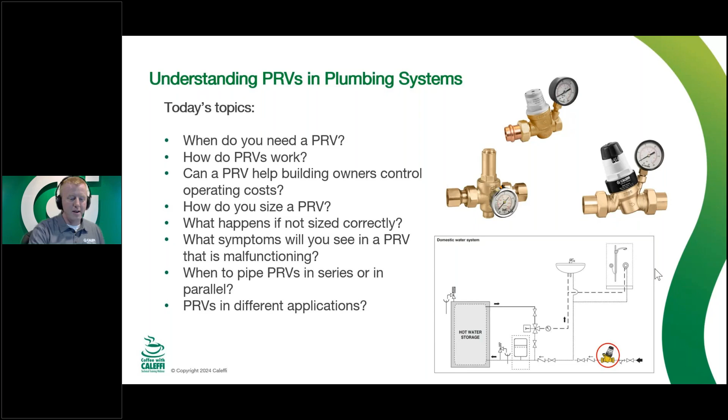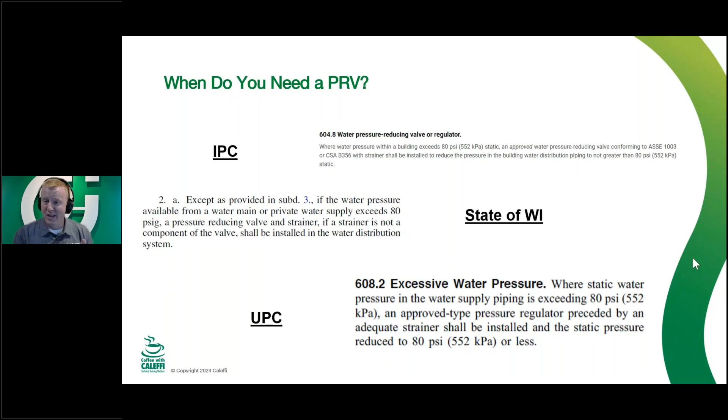So we'll dive right in here. When do you need a PRV? A PRV is a pressure reducing valve, pretty self-explanatory - it's a valve that reduces pressure. But when we talk about why we would need to reduce pressure, the simplest reason is that most of us are abiding by codes that require it. Not only do they call out very specifically 80 PSI, but they also call for a pressure reducing valve, and sometimes even a strainer, if your pressure is exceeding 80 PSI. So right off the bat, we've got IPC, UPC, and the state of Wisconsin, where we're based out of at Caleffi North America - again, 80 PSI is going to be your ticket.

There's a lot of information in there about minimum pressures as well, depending on the types of fixtures and things like that that you have in the building. But obviously for today's webinar, we're really more worried about excessive pressures, not necessarily those low pressures.

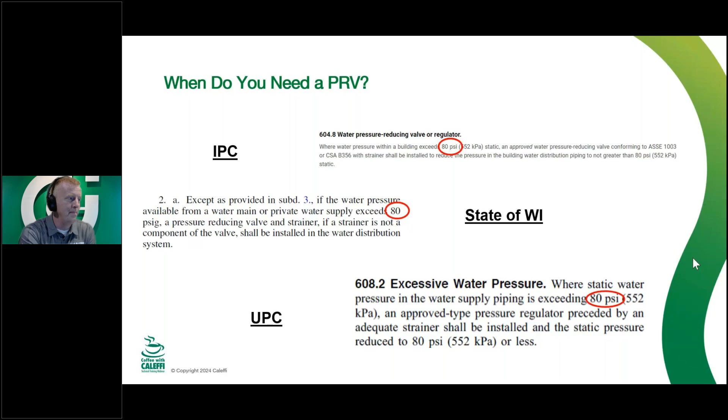So how do we end up with high pressures in residential, commercial, any of these buildings that you might have? Some potential causes for excessive pressure - first is going to be elevation. What we're talking about here is the difference between where the water is stored versus where the water is used. When you look at some places around the world where you've got water towers at a high point, and somebody way down at the bottom of a hill, you've got this potential for incredibly high pressure due to the height difference there.

The basic math here is 0.43 PSI per foot. You can see in this illustration, you've got 100 feet worth of distance from one residential home to the guy at the bottom here, and you'll notice it actually went up 43 PSI - that can be pretty substantial.

But the other thing we're seeing, even in areas in the central United States where we have pretty flat regions - I was in Quincy, Illinois, for example, a handful of years ago, and I always like to ask this question, you guys can feel free to jump it into the chat or questions pane. What's the highest pressure you've ever seen to a residential or commercial building? It's pretty common we'll see 90 to 100, 120 sometimes. But even in Quincy, Illinois, which is probably one of the flattest areas in the country, they were seeing 125 PSI into some of these buildings.

The other thing I always like to mention, especially to residential contractors checking homes during the day as they're checking the pressure coming into these homes - you got to remember that the pressure at that time is not going to be the same as what you'll see during non-peak times, like in the middle of the night. So I always encourage those contractors to put one of those gauges on a hose bib with a lazy arm or lazy hand that will register your peak pressure by the next morning, and just leave it there overnight to see what happens. Because a lot of contractors will see it's 75 PSI during the day and say, hey, I'm perfect, I don't need a pressure reducing valve - but it's not necessarily 75 PSI at night. So we need to make sure we're under that 80 PSI, regardless of elevation or even the flattest parts of the country.

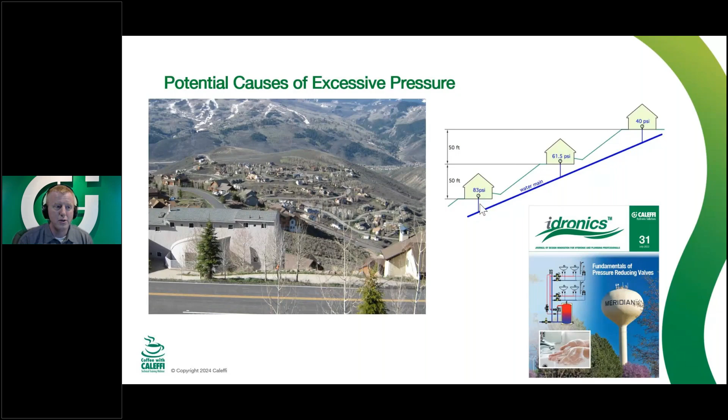So another good reason is going to be because of boosted systems. In order to get pressure to the highest points of a building, whether it be mid-rise, high-rise, whatever, typically if you're going more than 5 to 6 stories, you're probably looking into a booster system.

So as you look at this example on the right-hand side here, we've got a 30-story building, and in order to maintain a static pressure of 35 PSI at the very top of that building to make sure your flush valves work, you need to boost up to 180 PSI. With that 180 PSI, obviously we can't use that at the fixtures on the lower floors.

So we are going to have to reduce that down in those particular areas to maintain a safe pressure for those fixtures. As you can see on the left-hand side, our model, I believe that's Mr. Chris Swade, one of our reps there in the Chicago market, actually setting up and starting up a booster pump system there.

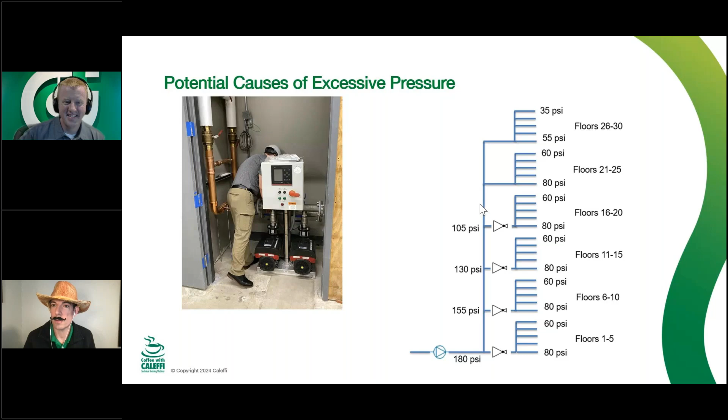Hey Cody, we got a comment that the domestic water pressure in downtown Kansas City is about 120 PSI, so this viewer said they didn't need a booster pump for a 9-story building. Wow, that's interesting. Even in places that aren't mountainous, it can come up.

That's an odd 120 PSI example. I think 120 PSI is enough to blow that fake mustache right off your face, if you got it in the right direction.

But yeah, it's pretty crazy. It's definitely, even in the flatter parts, you're going to see that quite a bit versus that picture we were showing before, I believe that's Colorado. But again, it just depends on where the water is being stored and where you're using it in a lot of cases. Sometimes we're just distributing high pressure like that to try to get out to those far-reaching areas and suburbs.

So when we talk about problems created by high water pressure, the first one that comes to mind is stress on piping and fixtures. You can see that picture on the right-hand side. Your flexible braided type hoses, washing machine hoses, even the flexes running from your stops to your fixtures, are going to be some of the most susceptible, especially washing machine hoses. When you put high pressure on those devices and you have a failure for whatever reason, you are going to have issues, and it's going to lead to insurance claims and all kinds of things we want to try to prevent.

From there, high pressure can also lead to water hammer type events, and more importantly, it leads to a lot of water waste. This is really important in areas that are more drought-stricken, like the southwestern parts of the United States, Southern California, things like that, to where if we can control that water pressure, we can control some of the consumption in those buildings and thus be able to save on water.

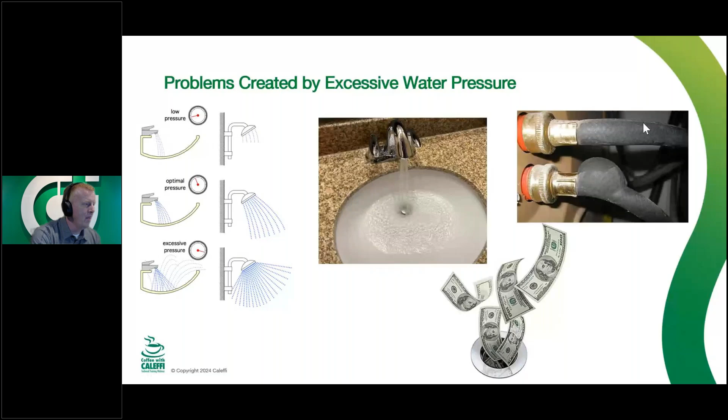So anything to add there, Kevin, before I move on here to the next style? Nope, that's all really good. Okay, perfect, good. Yep, perfect.

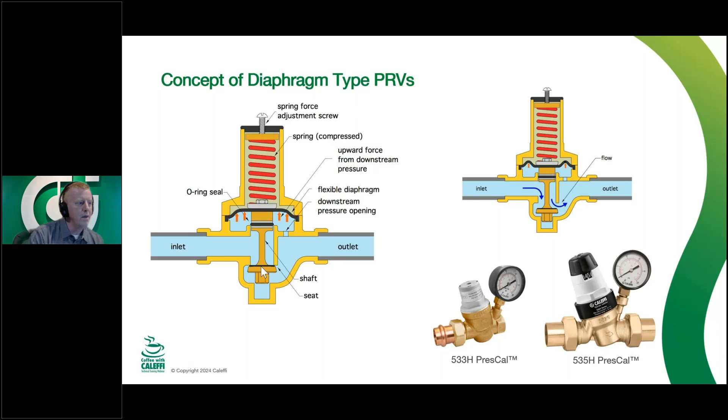You might think to yourself, why on earth would I want to use a piston style PRV over a diaphragm style PRV? Well, piston style PRVs are just a more robust pressure reducing valve. This is a valve that is going to be perfect for applications that experience lots of water hammer. Think of applications like irrigation, or laundromats, or anything with a lot of fast acting solenoids, like dishwashers, where you might see excessive water hammer. They're going to be able to hold up under those harsh conditions. Now, with piston style PRVs, they are slightly less accurate in some cases versus a diaphragm. A diaphragm style PRV is very accurate. Piston style PRV will be slightly less accurate, but it makes up for it with that robust capability of dealing with adverse conditions.

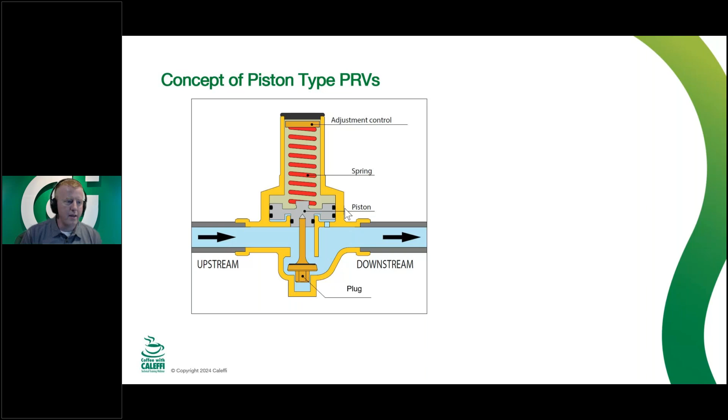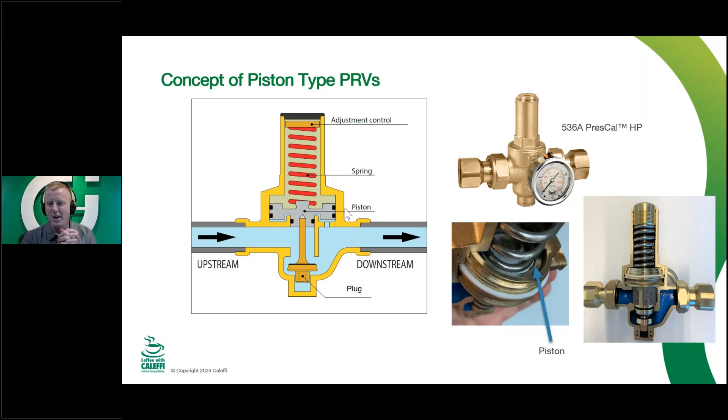All right, so moving on from how PRVs work to how do we size them. If I'm talking with a group of contractors, and I know there's a bunch of you on today, which I really appreciate, and lots of engineers too, coming off the heels of the great ASPE show in Columbus. I hope we saw you guys there, I hope you're able to make it, but we've got a lot of engineers on today. When I talk to those contractors, I always remind them, and the wholesalers too, when we talk about sizing PRVs, it's not just about pipe size. There's many areas, for example, that require a minimum service of 3/4 inch, regardless of how many bathrooms are in a house. We will actually get calls about how they're having some issues here or there, and we'll actually recommend going to a 1/2 inch PRV. Just because it's 3/4 coming into the house, feeding the rest of the house with that 3/4 inch doesn't necessarily mean you need a 3/4 inch PRV.

So, to kind of move on from that, when we talk about sizing, a lot of our water distribution, our domestic hot water, mixing valves, PRVs, all that fun stuff, we're typically doing it off of some version of what we see here, which is going to be referred to as the Hunter's curve.

Basically, we're going to apply a weight to the different types of fixtures. We add up all those fixture units, and from there, we take it over to the curves. You'll notice there are 4 different curves here, based on the different applications, and a lot of this is based on the probability of multiple fixtures being on at one time.

This was actually developed by Dr. Roy B. Hunter in the 1940s. You'll notice the curve at the bottom is for office buildings, the next one up is apartments, the next one up is hospitals and hotels, and the last one is restaurants.

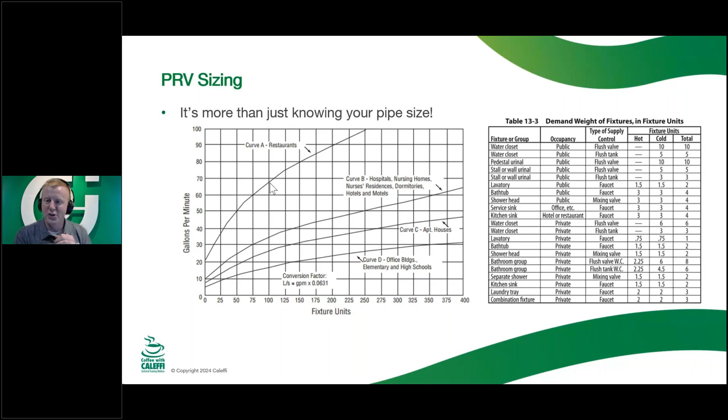So how do we get around this? We really don't have a huge relationship here, but I always try to bring this up when we talk about sizing things - I hope you guys have seen this before - this is the water demand calculator from IAPMO, the International Association of Plumbing and Mechanical Officials. They've produced this water demand calculator. It's available as an app for your phone, and it's available in a format like you see here in a spreadsheet.

Basically you enter in the total number of fixtures along with the fixture flow rates, and you press that green button, and it gives you your peak flow rate, or your 99th percentile demand flow. So you might think to yourself, well, I haven't seen this before - is it applicable to my area?

This is referred to as UPC Appendix M. If you are a UPC jurisdiction, this has also been adopted into the states of California, Massachusetts, and Wisconsin. So definitely use this to your advantage - this can really change how we size up everything in our systems.

Not just the PRVs - but basically, we want to know what that peak flow rate is, because we need to be able to size our pressure reducing valve as it pertains to this conversation. I talk about right sizing our buildings and right sizing our distribution.

If you get a chance, we did a webinar a number of years ago. It was kind of a case study webinar, and I think it was a really cool webinar. It was with Gary Klein, and they basically talked about this existing building - it was a nursing home facility where they were building an identical one right next to it.

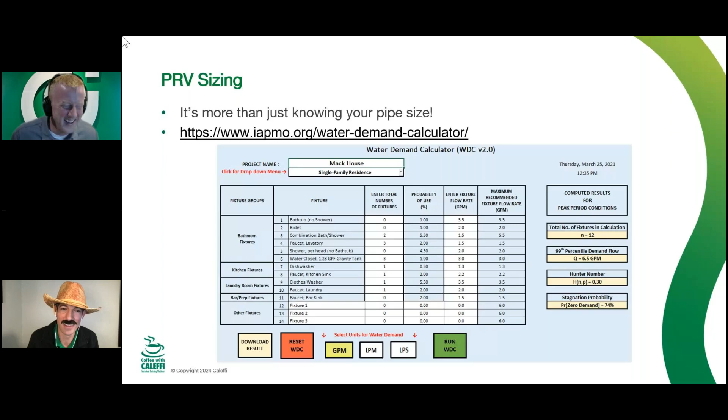He's gonna rob the train. No, so what's hilarious about that though is...

Max's mustache, but also the fact that with that 2-inch distribution, they actually put data loggers in the existing building, and they figured out over the span of several weeks the peak flow rate in that actual building was like 9 gallons per minute. So you think about how much everything was wildly oversized.

We talk about controlling operating costs. Let's control upfront costs as well. So right sizing these buildings is going to be key.

I've talked to a number of engineers that have used this water demand calculator, and I ask them how did it make you feel? And they say flat out that it makes them incredibly nervous because they're seeing flow rates like 50%, 40% of what they're normally used to. I just want to get across here that bigger is not always better.

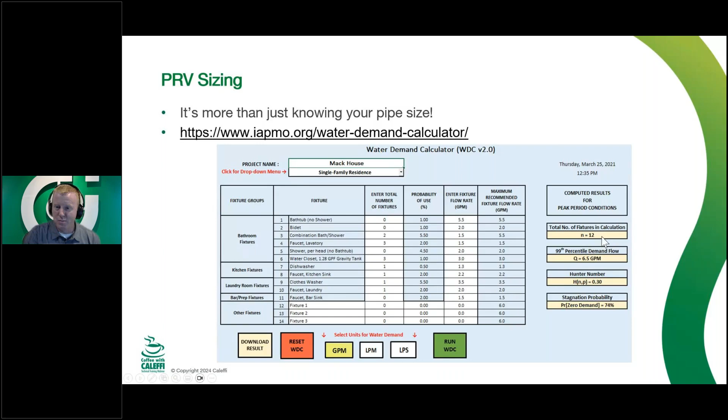That's a great point to bring up because I have 3/4 inch service into my house and 3/4 inch distribution for the entire house as well. So just because it's 3/4 inch or 1-inch pipe doesn't necessarily mean you need that size pressure reducing valve. We're going to size it based on that maximum flow rate or potential peak flow rate and get it in that 3 to 6 feet per second velocity range, and you're going to be good to go.

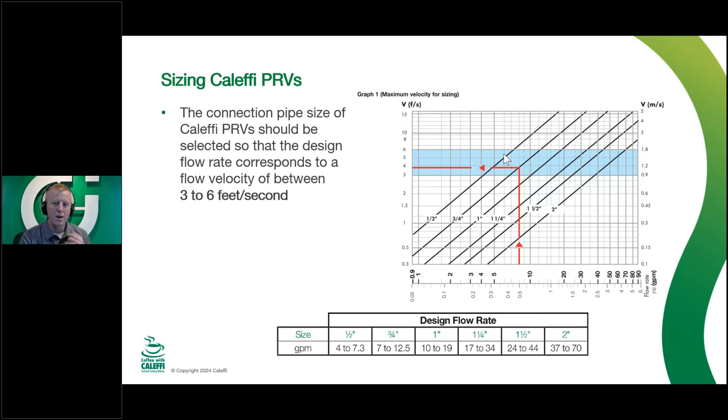But the other thing to consider, especially when sizing in commercial buildings and high-rise buildings where you might be a little critical as far as the pressure coming out of that, is what we refer to as fall-off pressure.

As I mentioned before, when you set a pressure reducing valve right off the gate, you're going to set it at a static condition. With nothing running in the house, you're going to try to set that pressure reducing valve to whatever your desired pressure is. What you'll see, though, is that as you start turning on fixtures, you will run into what's referred to as fall off pressure.

As a quick example, you've got that 90 PSI supply with a 75 PSI set point. You turn on one faucet and it doesn't drop very much, maybe 1 PSI, two faucets, 2 or 3 PSI. But then all of a sudden you start turning on that Roman tub, and that's when you start seeing it dive off a little bit. Not a lot, but it's getting down to 68. So that's a drop of 7 PSI.

And that might make a big difference in a commercial building where you might only have 35 PSI, or maybe 45 PSI, whatever the case may be. That might be an issue with your flush valves and some of those other devices. So we do also have a chart in our literature.

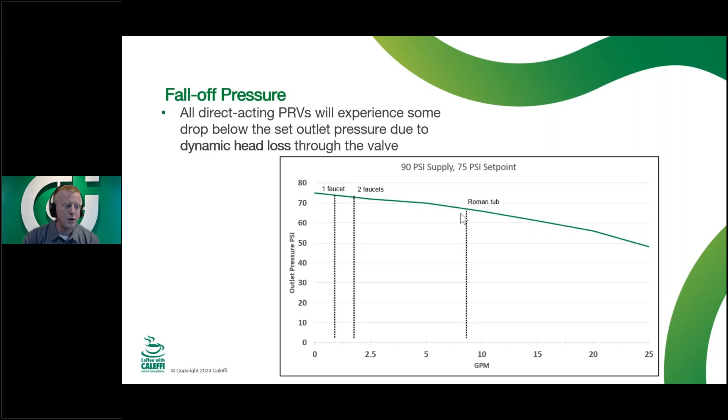If you do know that peak flow rate, for example 8 gallons per minute, you can take it up to the 3/4 inch pressure reducing valve line. You can figure out right off the bat that it's going to be a little over 7 PSI fall off during that peak flow rate. So it's not going to be 7 PSI every time you turn on a fixture, but it will be 7 PSI when you hit that peak flow rate in your calculations.

So from there, we've gone through the fact that we need to size these based on the peak flow rate. Maximum flow rate is definitely going to be key, we need to know that right off the bat. But one of the things that's often overlooked with pressure reducing valves, and that can cause a lot of grief, is going to be minimum flow requirements.

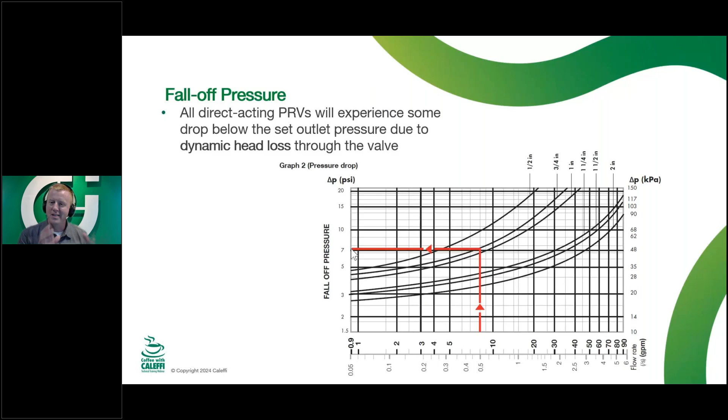Obviously it's a nuisance to whoever's in the building that has to listen to those noises. It might even sound like water hammer in some cases if the PRV is chattering quite a bit. But it's also going to be hard on your pressure reducing valves. It's going to mean that they are not going to live as long of a life as they could or should. So how do we deal with the fact that we need to meet maximum flows, but what about these minimum flows? How low are they, or how high are they, on the minimum flow requirements?

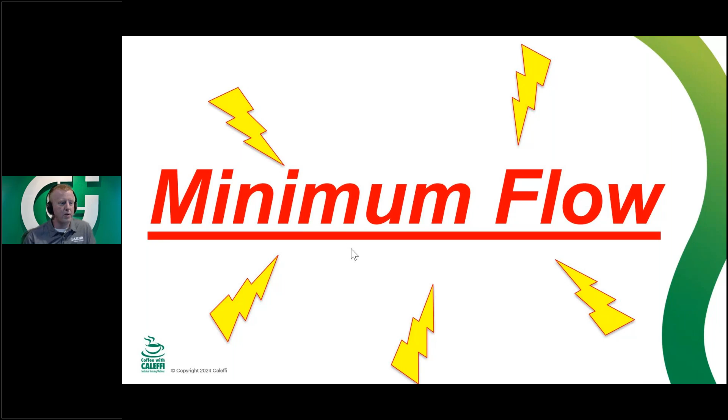So just as a quick example here, this is an application where we have a peak flow rate of 40 gallons per minute. With this peak flow requirement of 40 gallons per minute, we know right off the bat that we're going to need a 1.5 inch pressure reducing valve. But that 1.5 inch pressure reducing valve is going to have a minimum flow requirement of 7 gallons per minute. And you can't necessarily guarantee that with demand from fixtures, because 7 gallons per minute is quite a bit.

What you'll notice in our literature is that we recommend our minimum flow requirements match up to about 1 foot per second velocity through the pressure reducing valve. So if you're looking in that chart we showed a couple slides ago, 1 foot per second is going to be that minimum. But in the case of the 1.5 inch PRV, the minimum is 7 gallons per minute.

So what you'll notice is that as you start to have demand downstream of the PRVs, the small PRV is going to kick in first, because this one's set to a higher pressure. But as the fall off pressure starts to increase on the small PRV and it hits that 10 PSI of fall off, that larger PRV is going to kick in and take it the rest of the way.

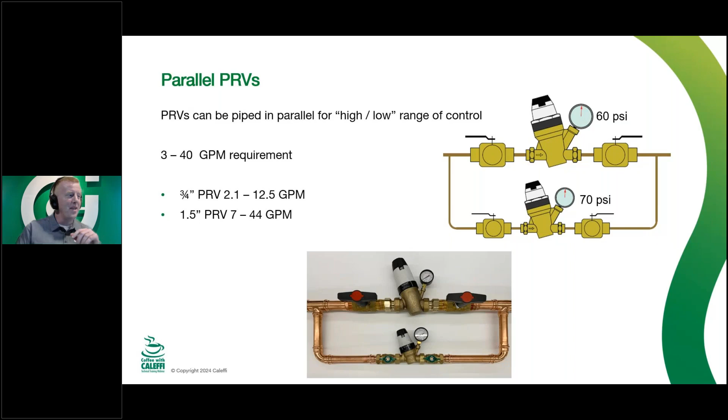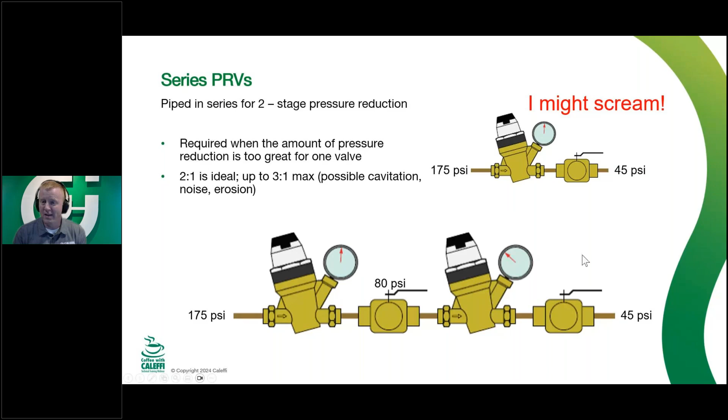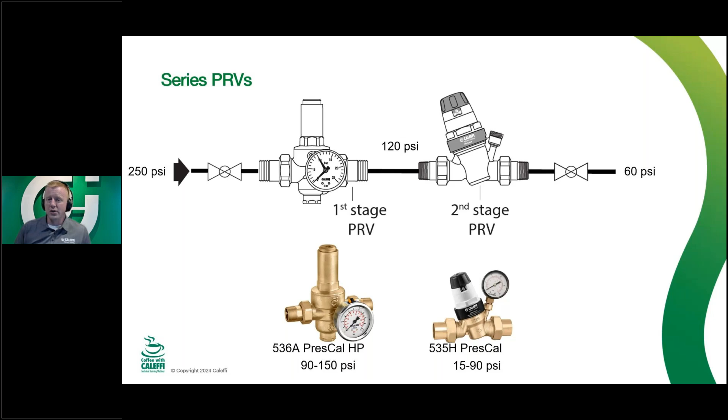Something to take advantage of here is a new kit we're offering. For mountainous regions or boosted high-rise buildings where you need PRVs in series because of incredibly high pressures, we've developed this kit with a small spool in between to keep that lay length really short, so you don't need big access panels and lots of room. We also have gauges downstream of the first PRV and the second PRV, so you can dial in that pressure easy peasy. Lots of different connection options as far as connection types, pipes and things like that.

But one of the things you might notice here, you've got the two PRVs in series, the gauges and everything, but you might be thinking to yourself, what in the world is that right back there? What that actually is, is a device to control expansion.

Now, what we have here with two PRVs is the first PRV where water comes through, and water goes through the second PRV. Let's say, for example, that water coming in off the street is 45 degrees because it's a cold climate - Denver, Wisconsin, somewhere north of the Mason-Dixon line. And you've got these PRVs in a mechanical room where it's 90 degrees. Now all of a sudden you've got 45-degree water coming in.

Demand stops. Nobody's flushing toilets, nobody's using the sink, everybody goes home for the day. And what's going to happen is that 45-degree water stuck between these two PRVs is going to start coming up in temperature. As engineers and contractors, we all know the damage that expansion and high pressures can cause to equipment, piping and distribution. Bear in mind, this is a tiny little bit of water, but we need to control that expansion - it can do quite a bit of damage. So we have that little expansion device back there to control that in that particular event.

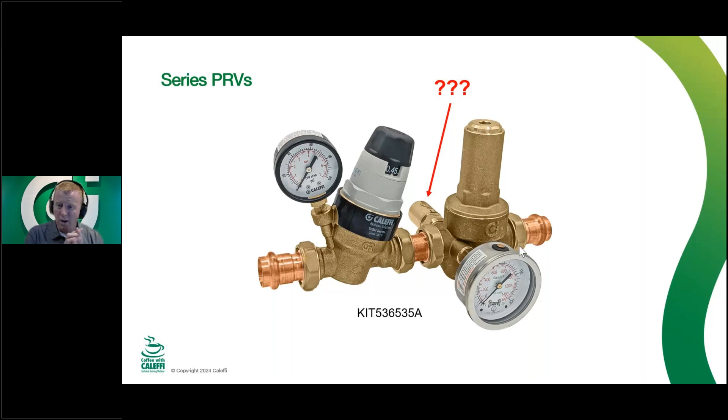So the comment from the contractor was, hey, we put this in and we go to leave for the night on this new construction job, and by the time I come back in the morning, it's 90 psi downstream, and I've got it set to 60. It's not holding the pressure that I want. It's going to give me issues, right?

So I took this PRV, I said, hey, send it back. He already had ripped it out, so he sent it back, and I installed this in our lab in Milwaukee. And within minutes, I could see that it was starting to creep up in pressure, right?

So what happens during long periods of inactivity is that high pressure starts to bleed by, because it can't seal off 100%. It starts to bleed by, and by the time they made it back in the morning, it was up to 90 psi or whatever the upstream pressure was. Obviously, that's less than desirable, right? So that's a big issue.

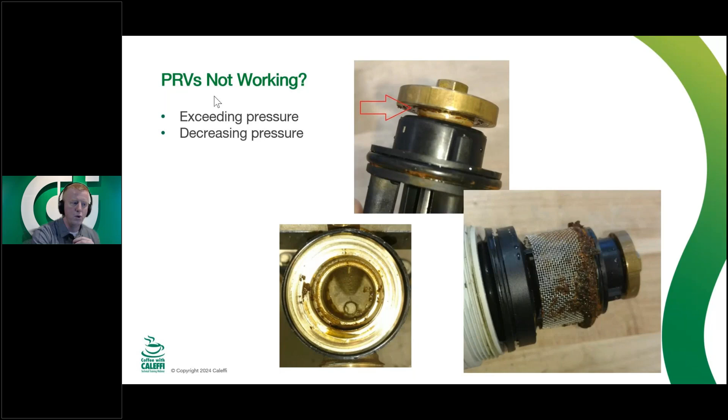So I would say, again, when it comes to malfunctioning PRVs, sizing and dirt and debris are going to be the two biggest issues. And I try to ingrain this into a lot of our contractors and building maintenance guys: these PRVs are designed to be serviced. You can pull that cartridge out, it's one piece, clean off that screen, clean off the sealing element, and put it back in. From there, you can also replace the cartridge if necessary — you can replace that whole cartridge as one piece and get that thing up and running again, right?

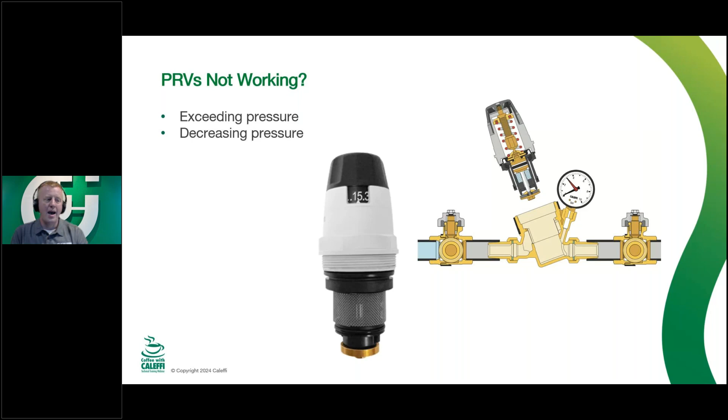So that's another one. Now, another good one to think about here when it comes to PRVs not working the way you want them to, or not meeting your expectations, is excessive downstream pressure on a PRV. A lot of the questions we have are related to improperly sized or improperly set thermal expansion tanks for domestic hot water production. So if you do have a pressure reducing valve in a system, whether it be residential or commercial, it doesn't matter.

It's not the pressure reducing valve's first intent, it's not its purpose in life, right? But it does act like a check valve or like a backflow prevention device almost — it allows water through, but it doesn't allow water back. And with that in mind, it's going to produce a closed system. And if you do have a domestic hot water production system downstream of that PRV, it is going to need a properly sized and set up thermal expansion tank.

Now, I will say, some pressure reducing valves actually have a bypass built into them to allow backwards flow. Some manufacturers tout this as a feature, but I can't say I'm a big fan of it. There's a couple reasons.

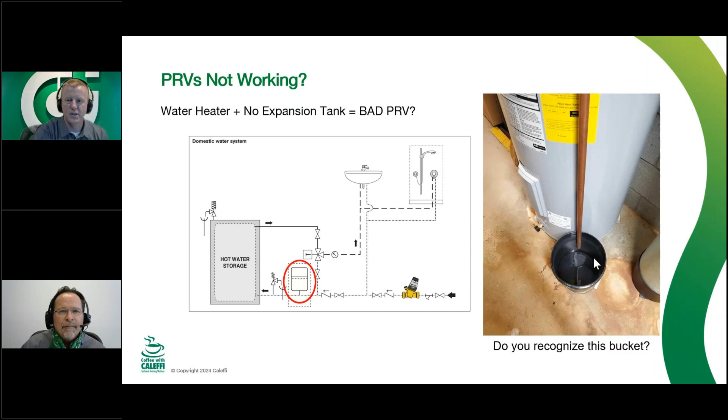From there, I'll invite my colleague Kevin back on, and we're going to talk about the different types of applications with pressure reducing valves. Kevin, I'll hand it over to you. Okay yes, stay there Cody, we can chat about these.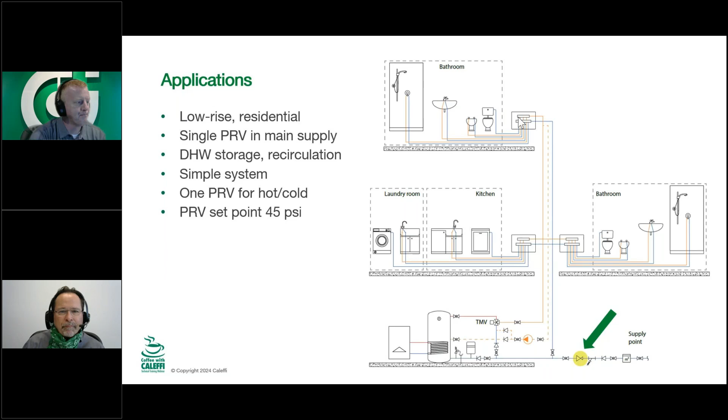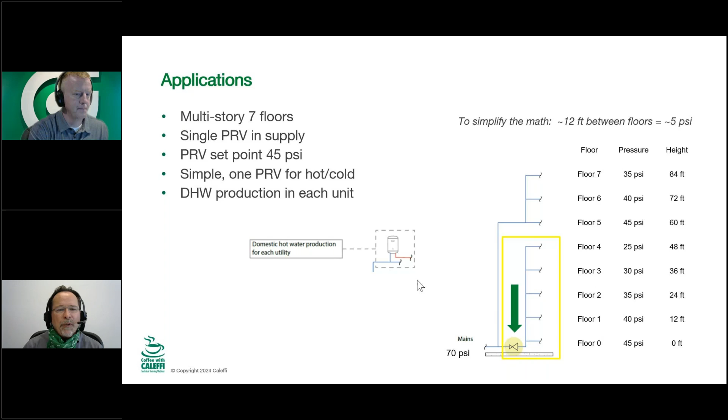Again, just one of the examples. Okay, go ahead. Yep. All right, so let's take it up another level.

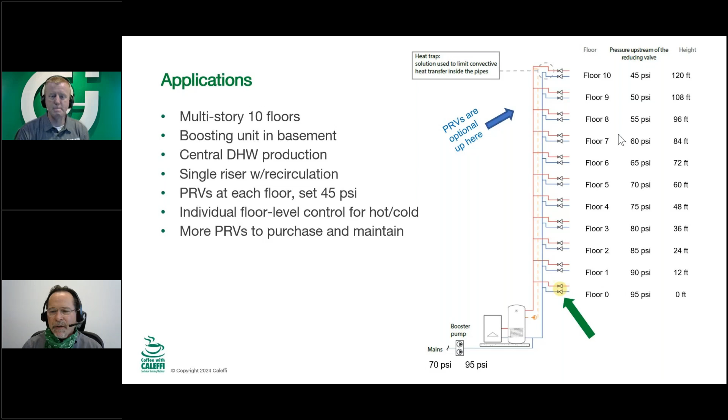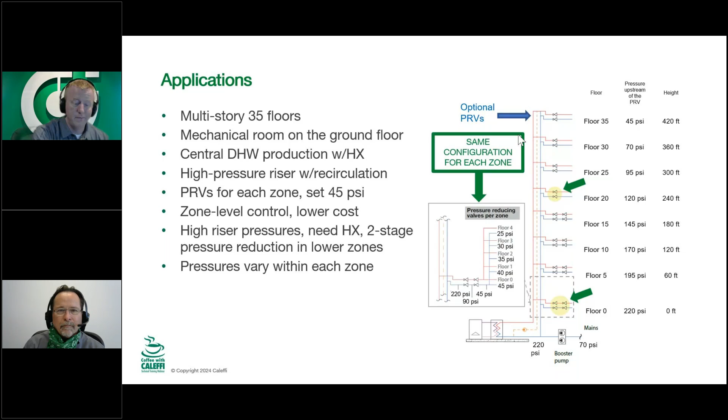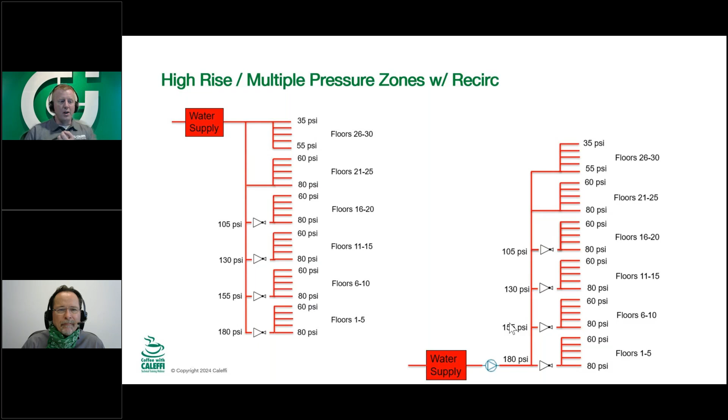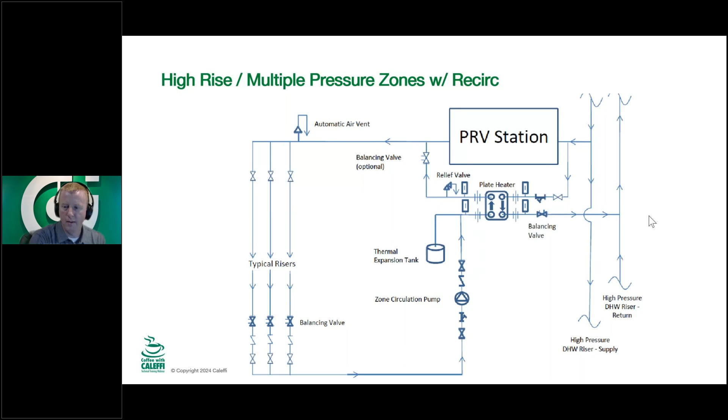So from there, we're coming to the end here, and I just want to summarize, pressure reducing valves and proper sizing can save your customers money, whether it be with water waste or stress and repairs due to high pressure, or potential failures that cost a ton of money to fix for your insurance company or your building owners. There's a lot of money to be saved here for this stuff.

PRVs, very simple devices, and they're very, very reliable, again, as long as they're sized appropriately and they're not all full of debris, right? So from there, sizing them properly will help to prevent undesirable outcomes, or those squealing noises, the chattering noises that we talked about before.

If you have a chattering PRV, you'll even see it on the pressure gauge where that needle will just bounce up and down. It's pretty bad on that. It's hard on the diaphragm, and we want to try to prevent that.

Pressure reducing valves have maximum and minimum flow requirements. So make sure we're abiding by those minimum flow requirements, and if necessary, do the parallel PRVs in those applications.

And we talked about this just a second ago, but parallel and series PRVs can help with flow requirements and high incoming pressures. So if you've got the high flow requirements and the low flow requirements, you can do that with the parallel. If you've got high incoming pressure and you're knocking it down to a ratio greater than 2 to 1, you can do the series PRVs to help handle that as well.

But malfunctioning PRVs, it's something that we get quite often on calls. Hey, I replaced this PRV like for like and it still doesn't work. Well, that's not necessarily the way we want to diagnose this, because that could just be a sizing issue. But when it comes to malfunctioning PRVs due to dirt and debris, they are easy to pull apart and clean up and diagnose like that.